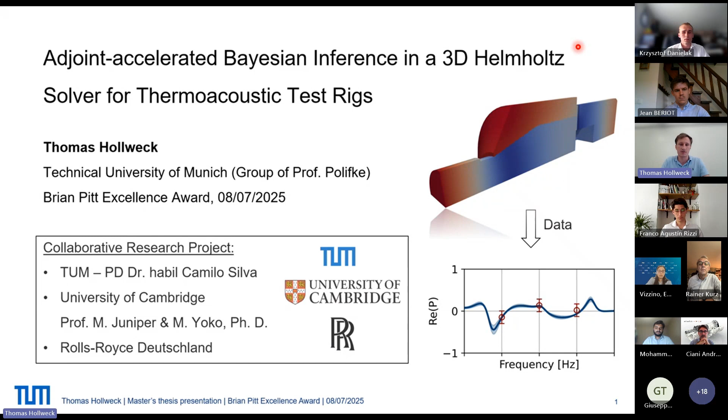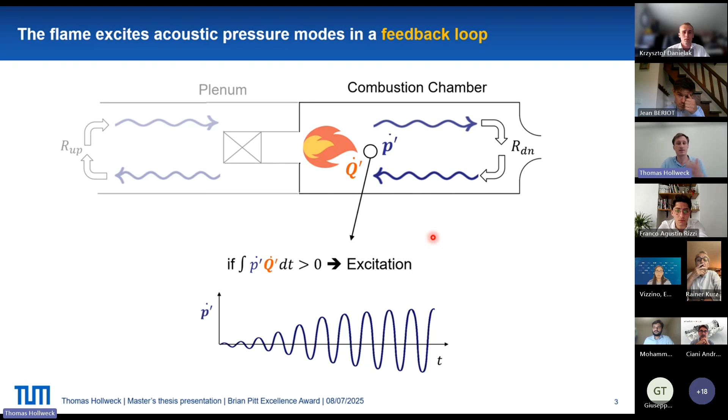How do they evolve? In a combustion chamber, the flame acts as a source of sound and emits acoustic waves, which can be then back reflected and propagate back to the flame, such that the feedback loop is closed. And in this feedback loop, we can excite those instabilities if the pressure perturbations and the heat release fluctuations are in phase, leading to high amplitude limit cycles potentially.

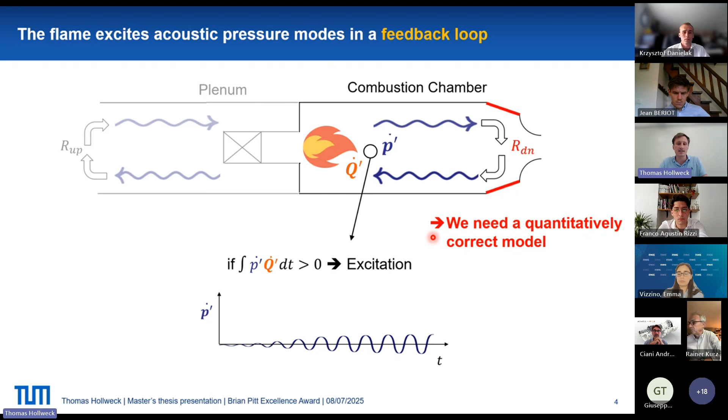However, we have the possibility to apply small design changes to mitigate those instabilities, since the thermoacoustic feedback loop is very sensitive to any kind of model parameters. However, to predict those changes, we need a quantitatively correct model, and just a qualitatively correct model is therefore not sufficient. And there are several models employed in thermoacoustics which differ in their model assumptions, their complexity. The one we focus on is a Helmholtz solver.

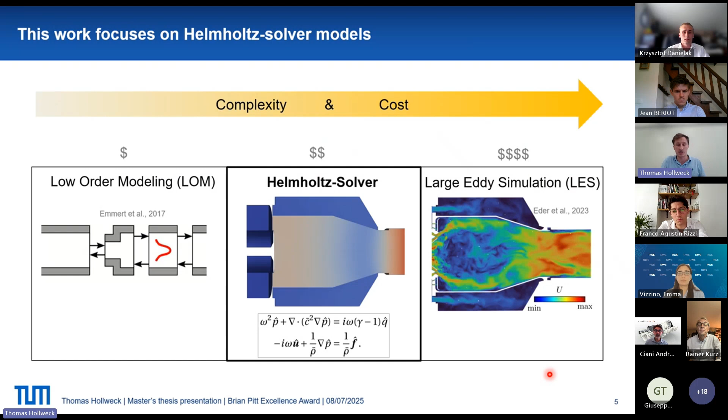A Helmholtz solver solves the 3D acoustic wave equations based on partial differential equations, and has, however, some simplifications like the assumption of zero mean flow, meaning it has some systematic model error. However, it is computationally efficient enough to perform some shape analysis, shape optimization in the early design process of a combustion chamber.

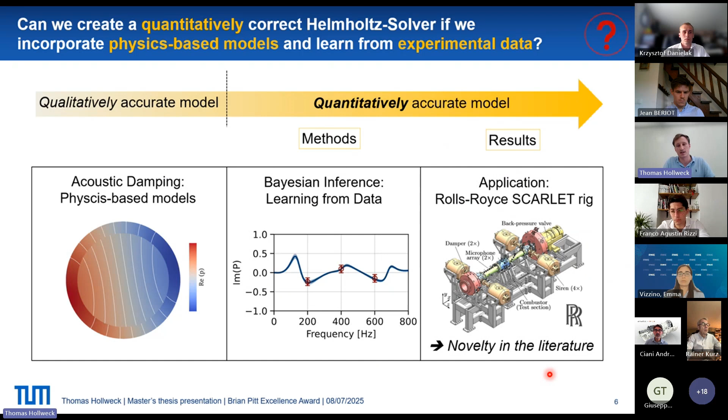In this work, we therefore investigate whether we can make such a Helmholtz solver, which is kind of qualitatively correct, even more qualitatively accurate by incorporating some acoustic damping due to mean flow, which is inherently neglected. And then in the second step, and this is what I focus on today, use data assimilation techniques to learn from data and possibly yielding a quantitatively accurate model, which is required. And we finally applied these methods to the Rolls-Royce SCARLET rig depicted here, which is kind of a state-of-the-art benchmark aero engine test rig.

So how do we learn these parameters? We have a physics-based model with a bunch of parameters which we are very uncertain of. And we use adjoint-accelerated Bayesian inference to get a posterior probability distribution of these parameters, incorporating all the prior assumptions we have on these parameters, and then this is formulated in the likelihood term, finding those parameters which agree with the prior and also explain the data very well.

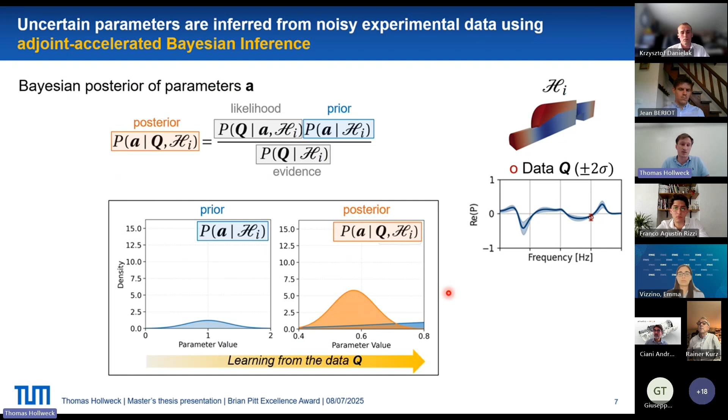And this process is illustrated here. So when we assimilate pressure measurements, we learn the values of those parameters and, as we see in the Gaussian here, get more certain in them. And to make it computationally feasible, we use adjoint methods. So the computational effort does not scale with the number of parameters.

Let us apply this to this test rig, which is depicted here. So the SCARLET test rig is operated under realistic engine conditions. And the combustion section in the middle is surrounded by two ducts, where we have some microphones installed, where we then can deduce pressure measurements, and we can force this rig upstream and downstream.

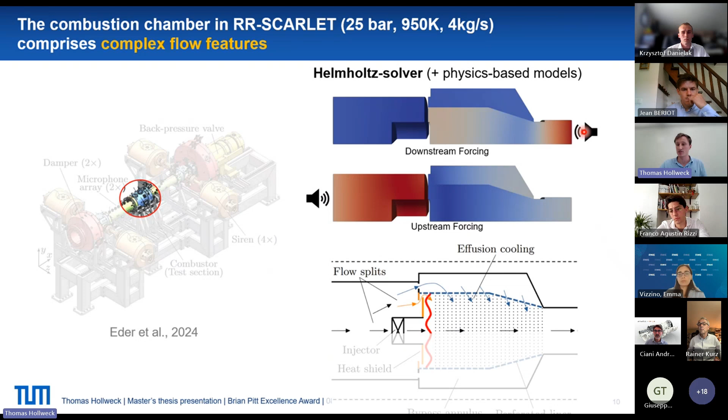This combustion chamber has a lot of complicated flow features, which a Helmholtz solver cannot model, but we include physics-based models in order to resolve this. And therefore, we have three-dimensional simulations with this Helmholtz solver, and in addition, these physics-based models, and assimilate data from upstream forcing and downstream forcing to get now a quantitatively correct model.

Let me summarize. This study has shown that we can use a very simple model, a Helmholtz solver, leave the physics in the model, use data assimilation techniques with adjoint-accelerated Bayesian inference, and then get a way more quantitatively accurate model. We can use such a model, for example, in the early design process of a combustion chamber to more reliably predict shape optimizations, and also go to frequencies where we don't have measurement data with uncertainty. In future research, we might extend the study even to reactive conditions and extrapolate to various operating conditions to verify our study.

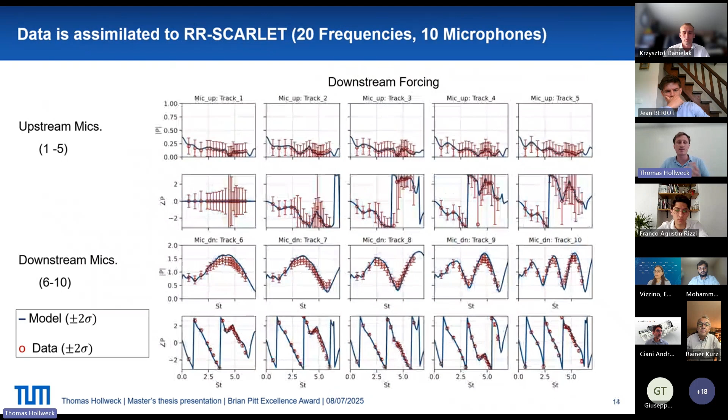That's also a very good question. In the study conducted here, I have a set of operating conditions as stated. However, the idea is, because we have a physics-based model, this model accounts for the operating conditions. And therefore, if it's a good model, and we try to judge whether it's a good model by this investigation, it should extrapolate to also non-measured operating conditions, which is definitely a part of future research and one of the biggest advantages of a model, because the experiments are super expensive, particularly the hot experiments.

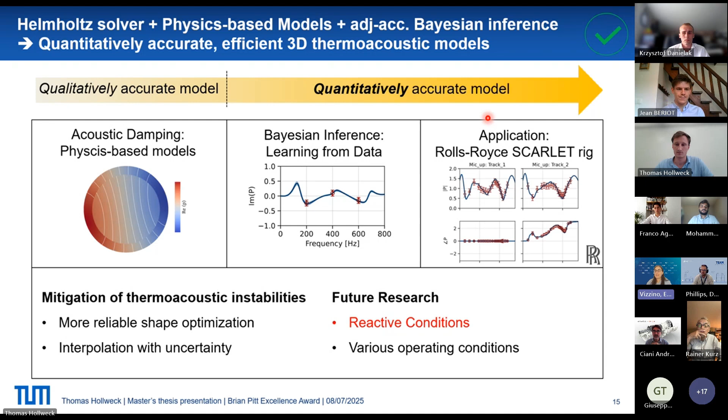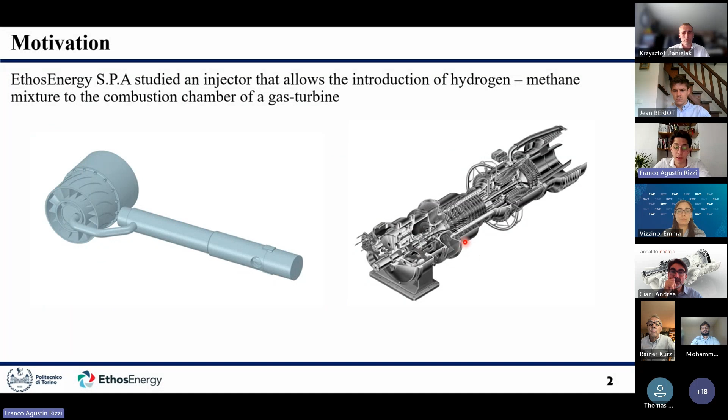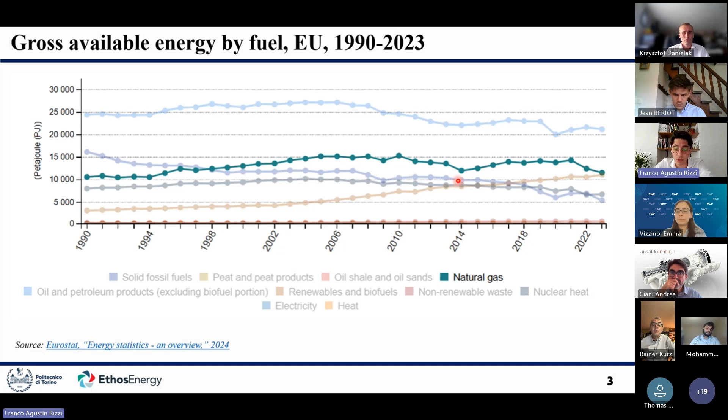So a CFD model, a RANS model, is developed in order to study it and be sure that the combustion will work and how it will work, and to characterize it. Here on the right you can see the combustion chamber, and on the left is the model of the injector.

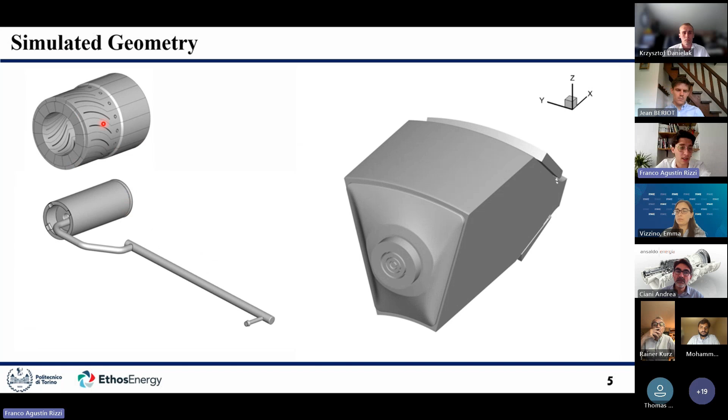Taking advantage of the axis symmetry, the model is reduced to a portion, and the injector is separated into two different models to reduce the model further.

Then the fluid profile is extracted here and here, in order to copy it back towards the combustion chamber. But of course, this has to be reconstructed and then set up in the simulation.

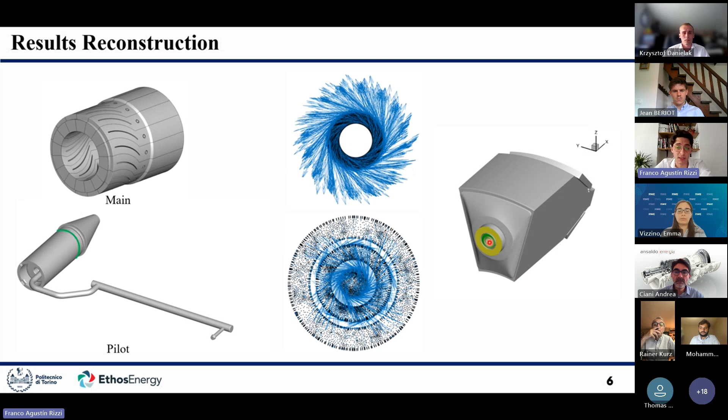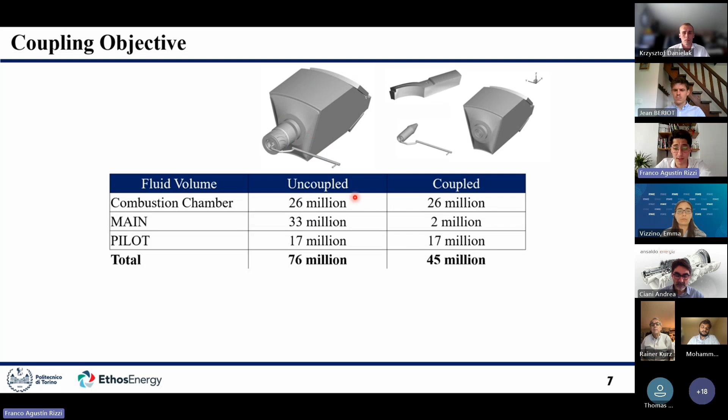The question arises: why do all this? Why not model the complete model with the injector without coupling, avoiding this complication? The reason is there's a 40% reduction in the number of elements, making it much more feasible for reproduction and with lower computational requirements.

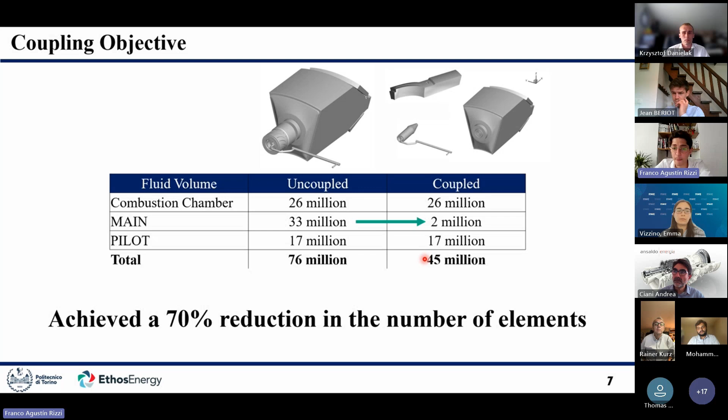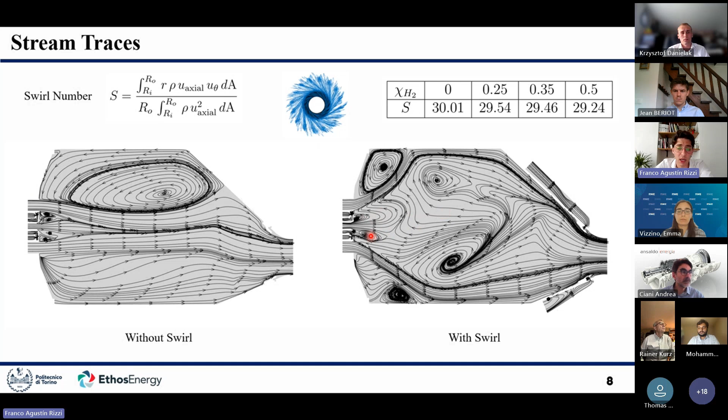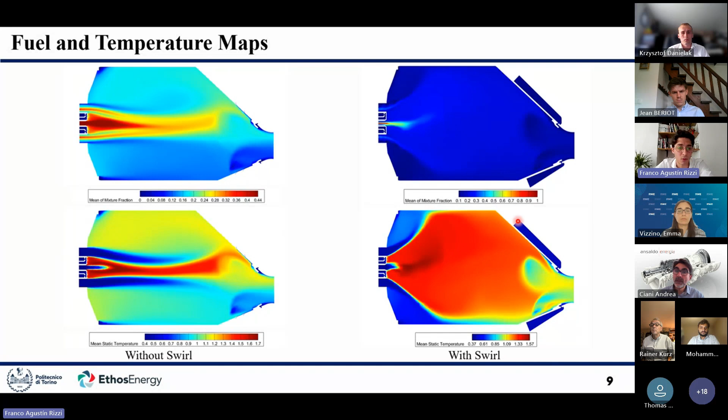When the swirl number is higher than 5, there's great recirculation, and also a low velocity region is generated, allowing the flame to be anchored. Looking into the mixture fraction and static temperature maps, we can see it becomes way more uniform with the actual mixing, which makes sense.

You may note there's a difference here, and this is the modeling of the effusion holes. This is the cooling of the wall of the liner, and these are the dilution holes. These are the diffusion holes. These are the splash holes.

One first approach was to use two cooling stripes for the fluid coming through these small holes. Meshing it would be quite expensive in terms of element size. An alternative was found: using a perforated wall model that assigns injected fluids to surfaces.

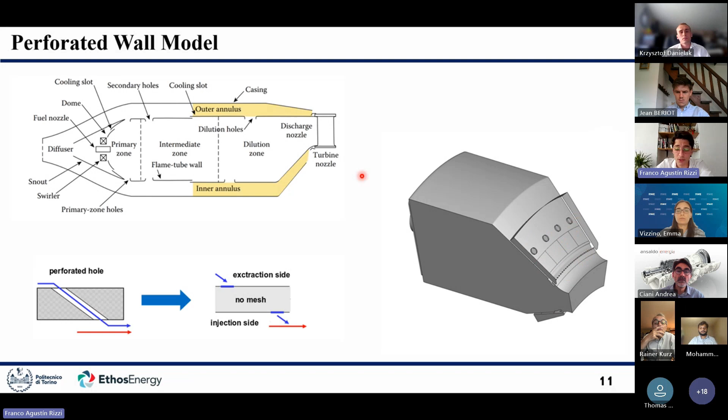This requires an extraction surface, so the annulus had to be incorporated into the model. These four surfaces are the injection side of the effusion holes. Note that the dilution holes and splash holes are also included inside the annulus, allowing them to be modeled as well, so it was a double improvement.

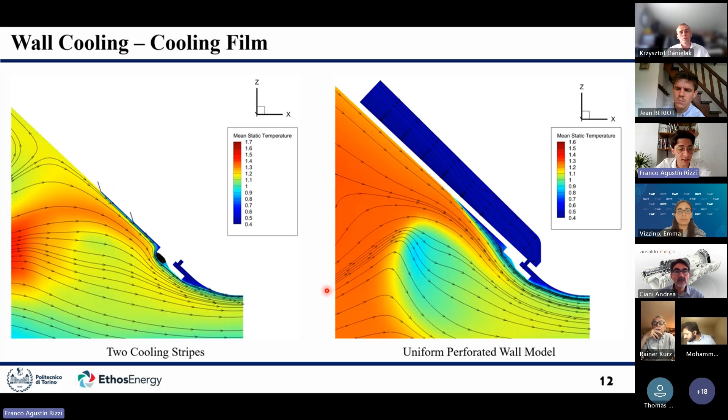Looking into the two cases, first with the two stripes, there wasn't a great cooling film, so it became more realistic once the dilution holes were included. The original case had flow normal to the surface, which was not the actual case. Once it's modeled, there's a bit of deviation.

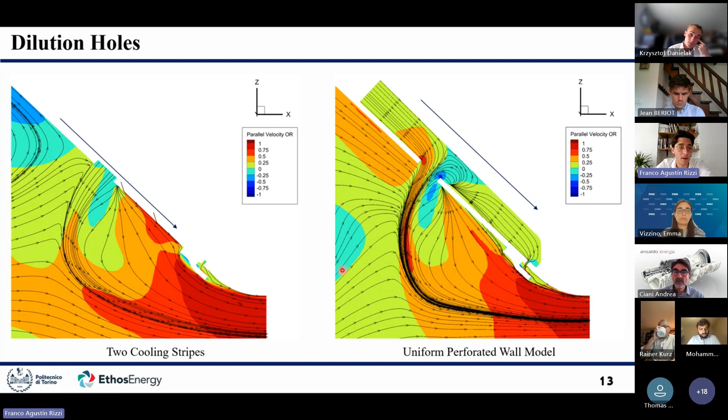Changing the inlet and the cooling changes the outlet temperature distribution here. It becomes way more uniform, which is the desired result. You can also see some low temperature regions here.

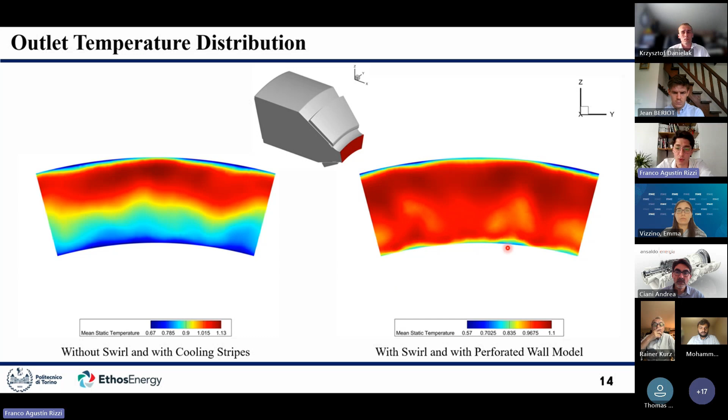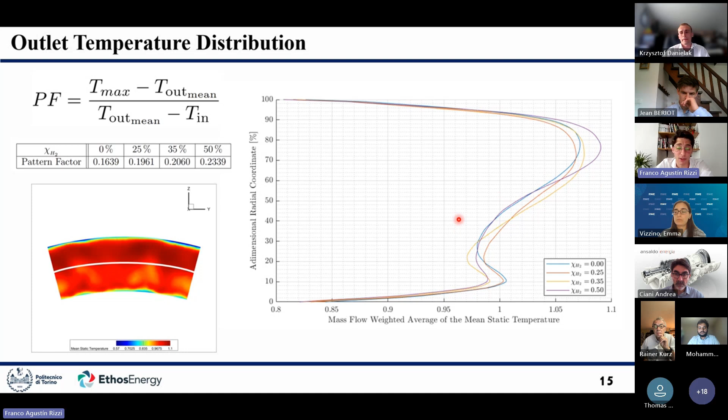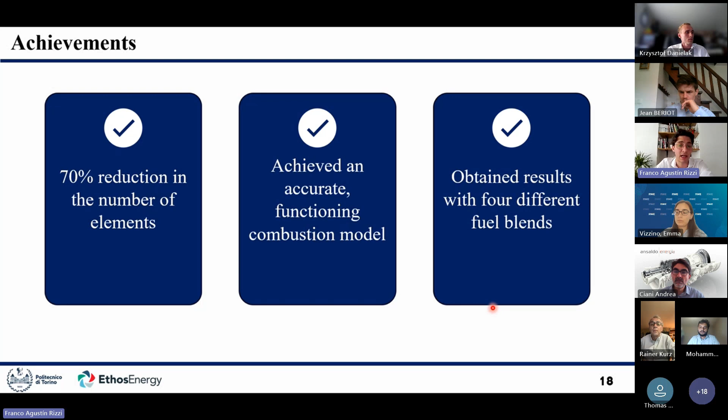To sum up, the first achievement was the 70% reduction in the number of elements, making it more feasible for reproduction and reducing computational requirements. Then, achieving an accurate combustion model is required in order to compute the NOx simulation afterwards, since it's a post-process of the combustion. And then the four different fuel blends were achieved, allowing us to characterize the combustion chamber. Thank you very much.

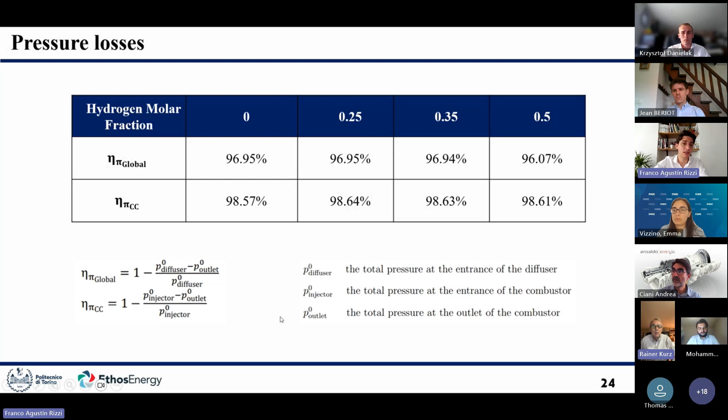Well, actual flashback was not the idea of looking into the upstream movement. We were looking into the position of the highest concentration of OH. This is how we saw the flame moving upstream, but we didn't actually see flashback.

Okay, but you would have seen it if there were flashback, so the model would have been capable? Exactly. And I believe that before setting up the settings, some models saw something going towards the injector, but we would be able to see it. Yes. Okay, thank you.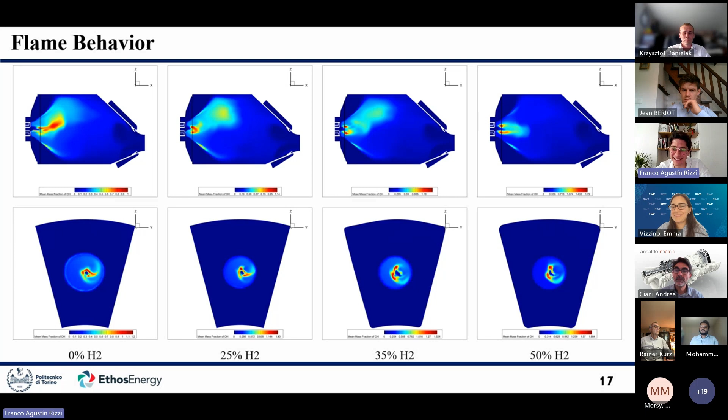Sorry, the diameter of your injector? No, I can't say the diameter of the injector because I'm not allowed to. Sorry. Okay, no problem. Thank you, I'm sorry. It's okay, intellectual property, we know.

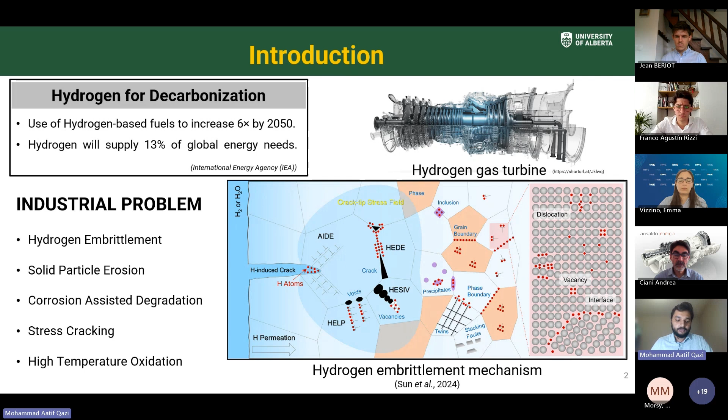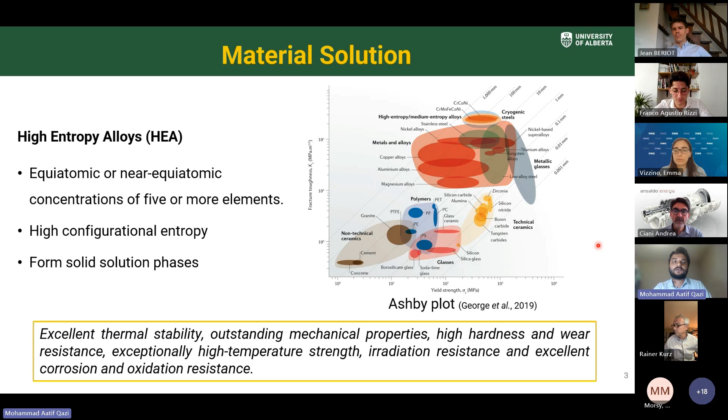To combat these problems, we need a material solution, and high entropy alloys are one such material, produced by equiatomic or near equiatomic mixing of 5 or more elements. High entropy alloys lie at the top right of the Ashby plot, meaning they have high fracture toughness with high yield strength. Overall, they have excellent thermal stability, outstanding mechanical properties, high hardness and wear resistance, and excellent corrosion and oxidation resistance.

To protect energy systems using high entropy alloys, we need a coating fabrication process. Flame spray is one such cost-effective process. Our group has been working on flame spraying high entropy alloys, and we have found that they have high hardness, promising oxidation resistance, high wear resistance, and high corrosion resistance.

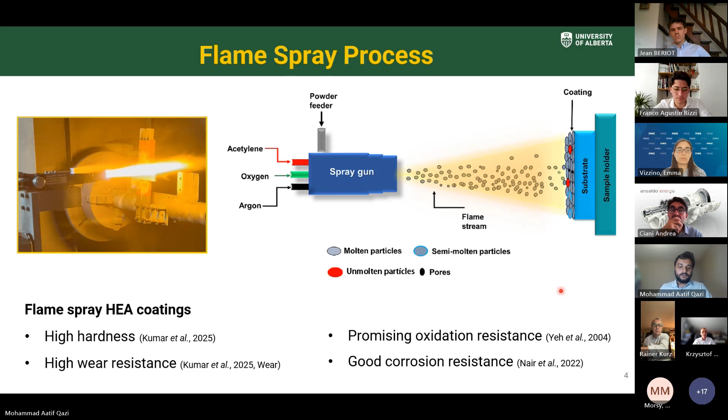Coming to the motivation behind this study: flame sprayed AlCoCrFeMo high entropy alloy was developed at our group, and it has shown excellent performance against wear, erosion, and chloride induced corrosion. Zirconium comes in as a strategic addition because it forms hard Laves phases and ZrO2. It also facilitates hydride formation and hydrogen trapping. Overall, this study investigates how zirconium addition can unlock new frontiers in flame-sprayed high-entropy alloy coating performance by integrating wear, corrosion, and hydrogen resistance into a single coating system.

Overall, producing a multifunctional coating with the potential to combine bond and top coat functions for simpler turbine hardware protection. The objectives of the study include the development of AlCoCrFeMo coatings via flame spray, evaluation of mechanical performance under impact-dominated loading conditions, assessment of corrosion behavior, and finally, the investigation of hydrogen embrittlement resistance.

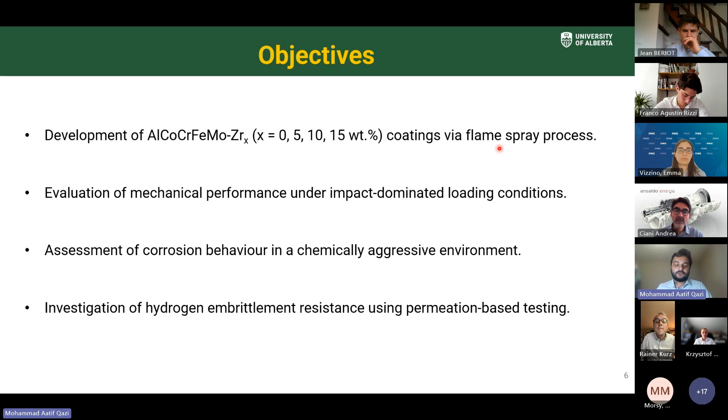The experimental methods include preparation of the feedstock by tumble mixing of Zr in 5, 10, and 15 weight percentage to AlCoCrFeMo, and characterization of the powder. Then we move to the coating fabrication using flame spray on 316L stainless steel substrates, and characterization of the coatings. Then the coating performance assessment using mechanical tests like microhardness testing, coating adhesion testing, solid particle erosion testing, and then electrochemical tests like electrochemical corrosion testing and Devanathan-Stachurski hydrogen permeation testing.

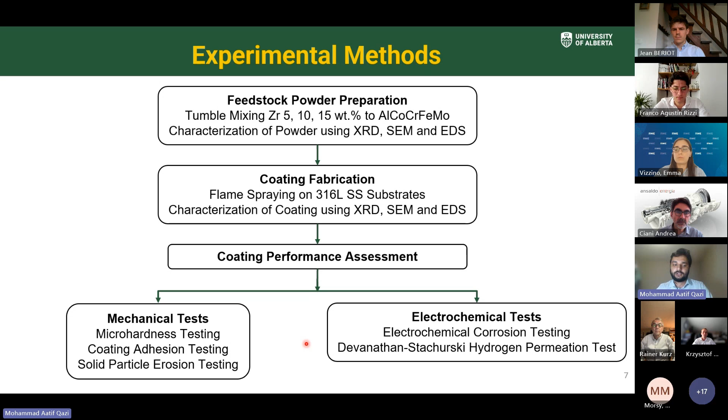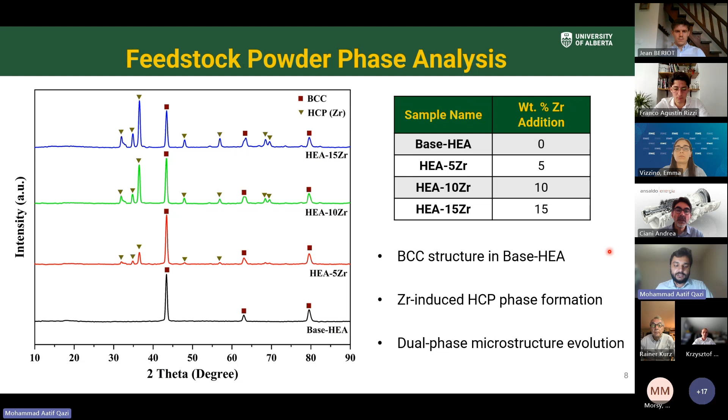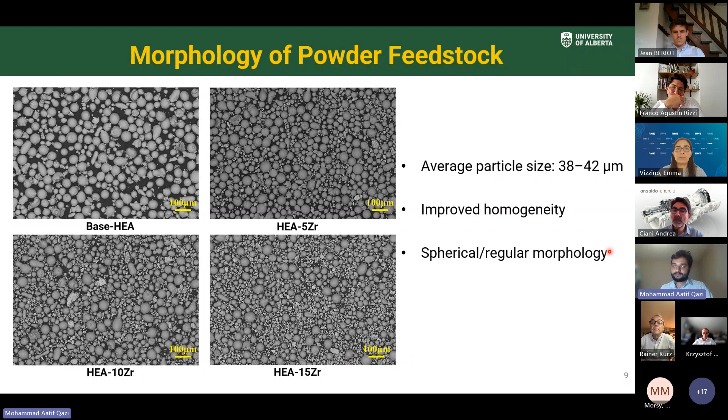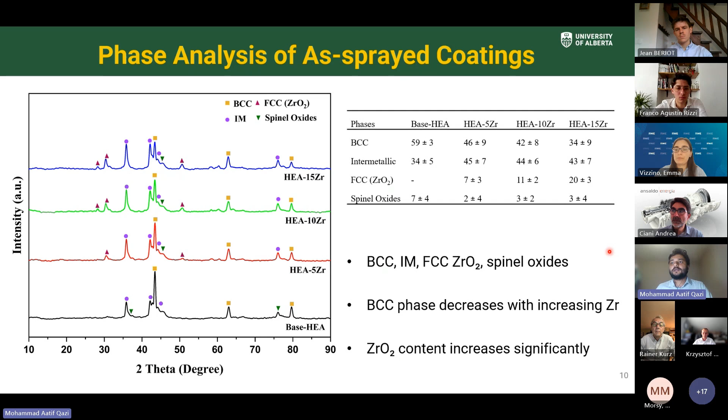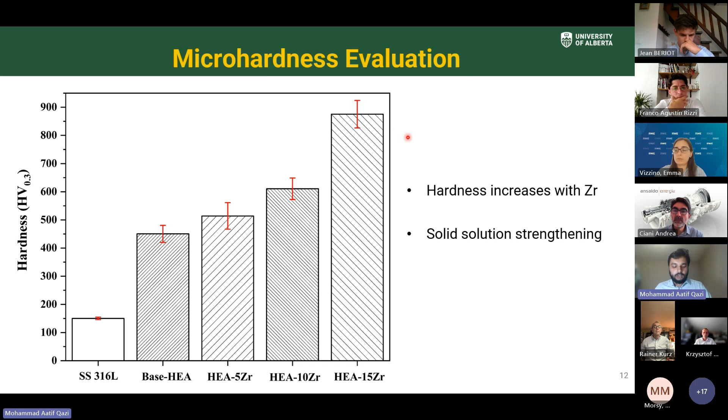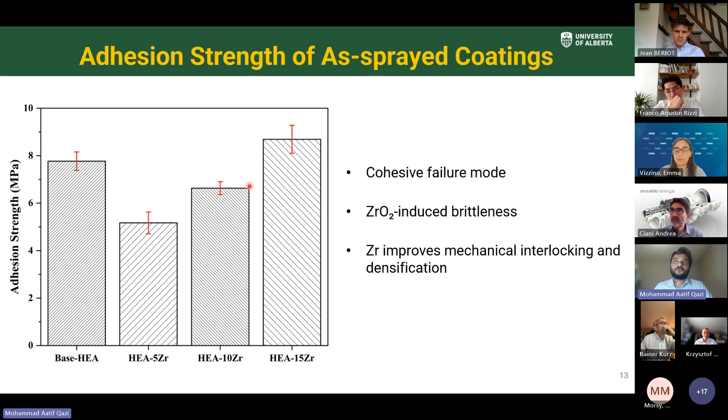Moving to the microhardness evaluation, which shows an increase in the hardness with the increase in Zr, reaching up to around 900 HV. Next, we have the coating adhesion strength test, which shows a cohesive failure mode with an initial drop in the adhesion strength at 5 weight percentage, but then an increase in the strength up to 15 weight percentage. The solid particle erosion testing done at 30-degree impact angle showed decreasing erosion rate up until Zr 10 weight percentage, and then a slight increase at 15 weight percentage.

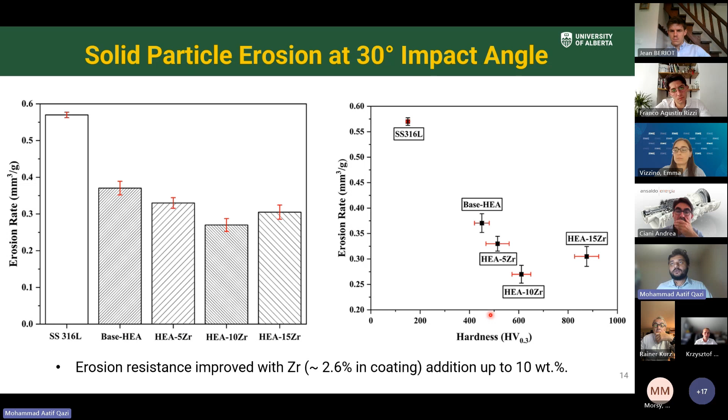Comparing the erosion rate with the hardness, we see the erosion rate decreases with the increase in the hardness up until Zr 10 weight percentage, but then an increase in the erosion rate with the increase in hardness. So it shows that toughness also plays an important role in determining the erosion. Similar results were observed when solid particle erosion testing was done at 90-degree impact angle. Next up, we have the electrochemical corrosion testing, which shows increase in the corrosion resistance as the Zr content in the coating increases because of the formation of stable Al2O3 and

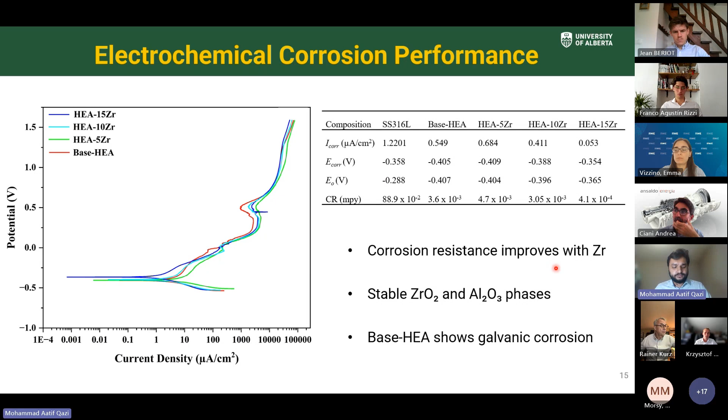ZrO2 phases. And finally, the hydrogen permeation performance assessment of the coating showed initial hydrogen ingress due to high diffusion coefficient, but suppresses the hydrogen movement within the microstructure because of high trap density and low solubility, overall outperforming the substrate SS316L.

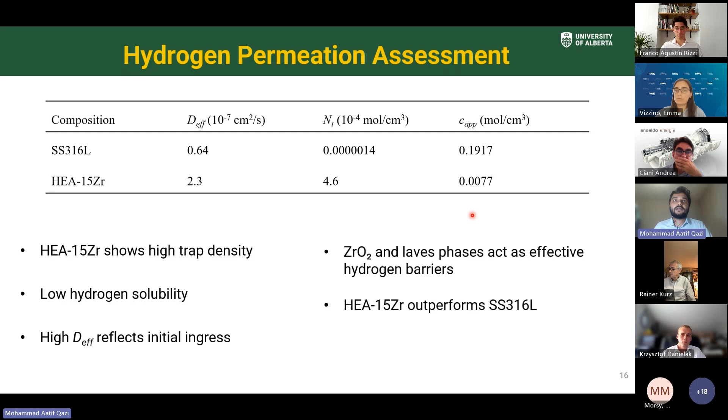Coming to the conclusion from the study, we were able to fabricate AlCoCrFeMo coatings using flame spray. We saw an improvement in the mechanical performance, with HEA-15Zr exhibiting the highest microhardness and adhesion strength. HEA-10Zr is the most erosion-resistant composition. Zr addition enhanced corrosion resistance, with HEA-15Zr showing the lowest corrosion rate. And HEA-15Zr is an effective hydrogen barrier. Lastly, by addressing key surface degradation modes, these coatings pave the way for resilient and hydrogen-compatible turbine components.

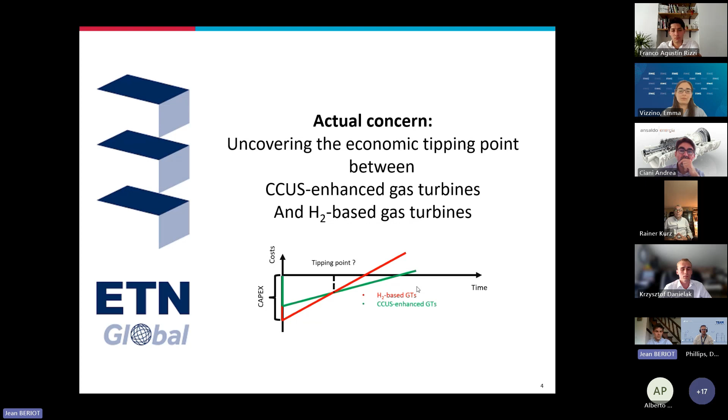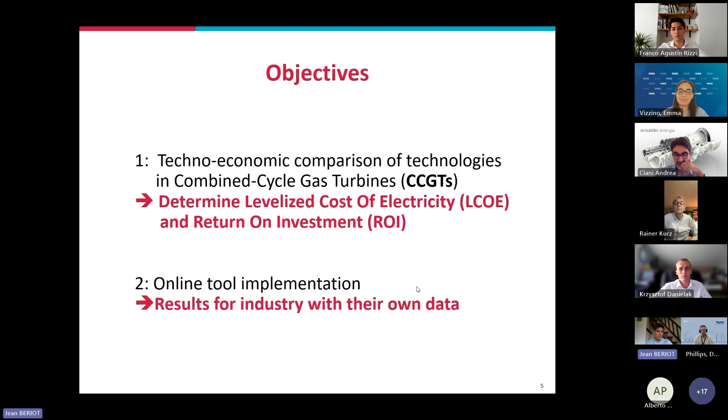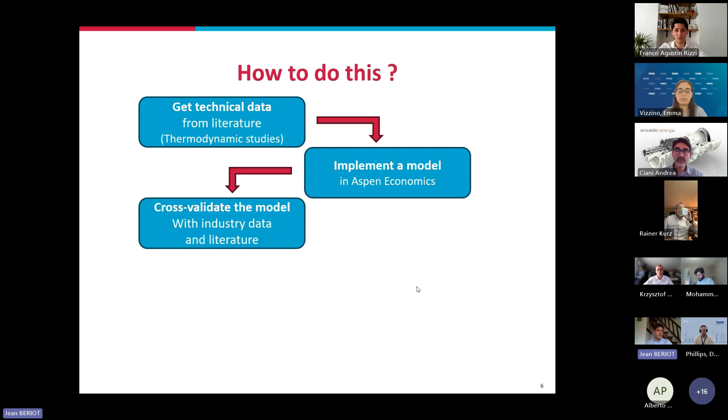In this context, one of the main actual needs of ETN is to determine which of the two technologies will be economically more viable by uncovering the economic tipping point between the two. And this is what I did in this study by first performing a techno-economic comparison of the technologies in their combined cycle form, and then implementing an application allowing industry members to get their own results with their own parameters. And I did this by first gathering technical data, allowing me to implement a model on Aspen economics to get technical and economic values that I later cross-validated with data from industry and literature, ensuring the implementation of a consistent economic model of the two solutions to finally get results.

So let's begin with the technical part of it by first talking to you about carbon capture. The main economic advantage of this is a reduction of the carbon taxes, but this is at the expense of some negative outcomes. Indeed, this process will lower the efficiency of your power plants, and then it is an expensive process with particularly high investment cost and also involving additional OPEX, but we will see these later.

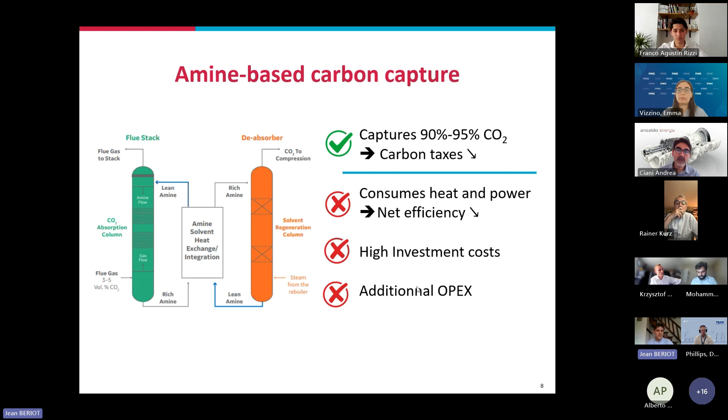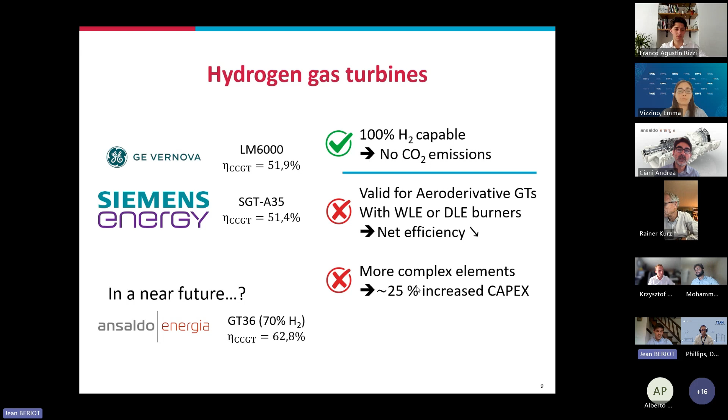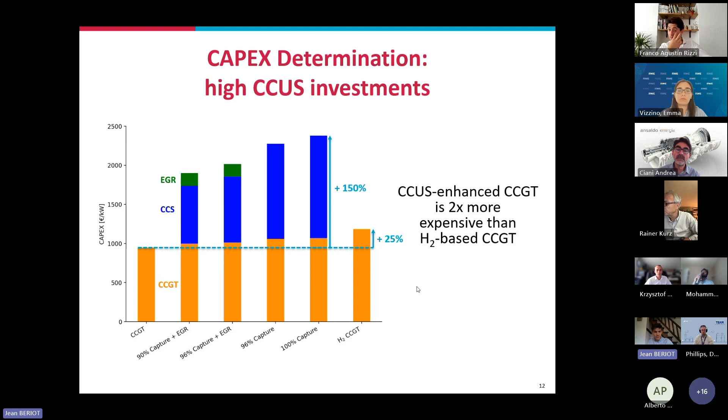But what's the price of these power plants? Well, this can be plotted on this chart, where you can see that carbon capture is expensive. And by expensive, I mean twice as expensive as a hydrogen gas turbine. Indeed, while investing in a hydrogen CCGT will only be 25% more expensive, capturing 100% of the CO2 will lead to 150% more CAPEX. And then, what will be the cost to run each of these power plants? And this can be plotted the same way.

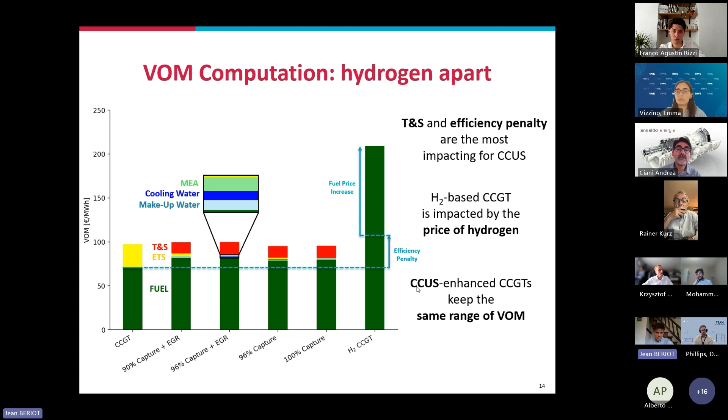On the other side, for hydrogen gas turbine, the efficiency penalty impact is directly combined with a fuel price increase due to the high price of hydrogen. And now let's see the impact of it on the results. And let me first compare the LCOE of the different technologies, where you can see that CCS doesn't increase the LCOE of a CCGT that much, with an increase mainly due to the additional capex, while a hydrogen CCGT LCOE will be more than 10 times higher due to the higher marginal cost.

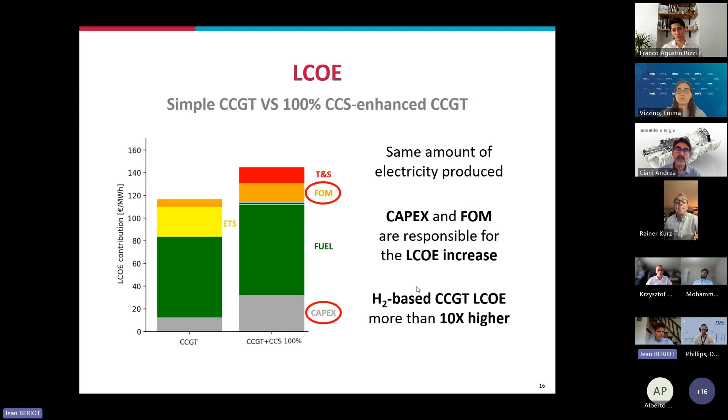But what about the tipping point between the technologies? And without any surprise, there is an economic tipping point after 15 years. But my question is, do we really care about this tipping point? No, the main conclusion is neither of the two solutions is currently worth it. But hydrogen-based CCGT has more work to do than CCS-enhanced CCGT to be economically viable.

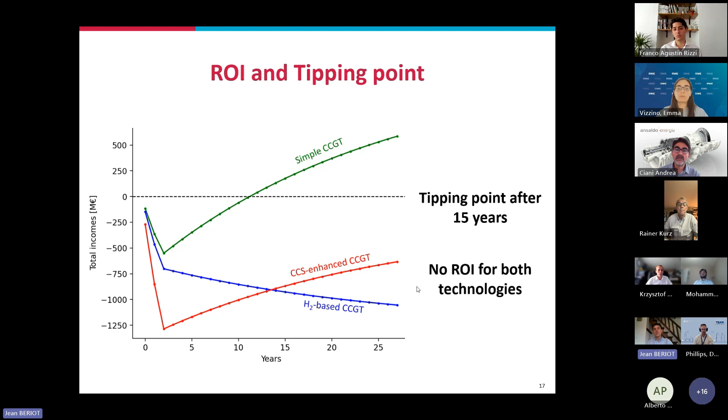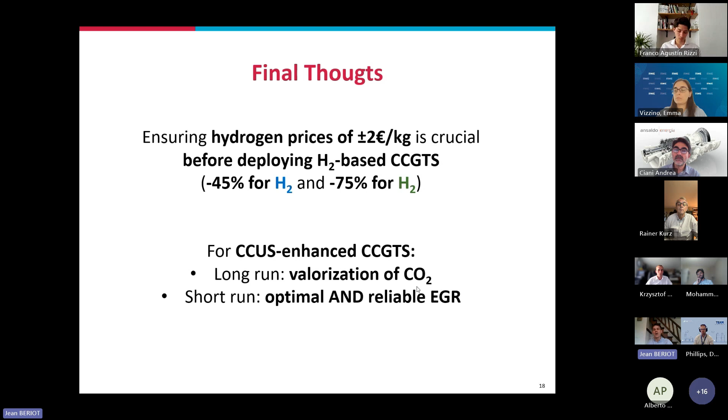Knowing this, what I can tell you is that ensuring hydrogen prices averaging 2 euros per kilogram is crucial before deploying hydrogen-based CCGTs. And this represents a 45% reduction for blue hydrogen prices and a 75% reduction for green hydrogen prices. And then for CCS-enhanced CCGTs, a long-run important challenge would be to valorize the CO2, while a closer challenge is to ensure an optimal and reliable EGR in combination with CCUS.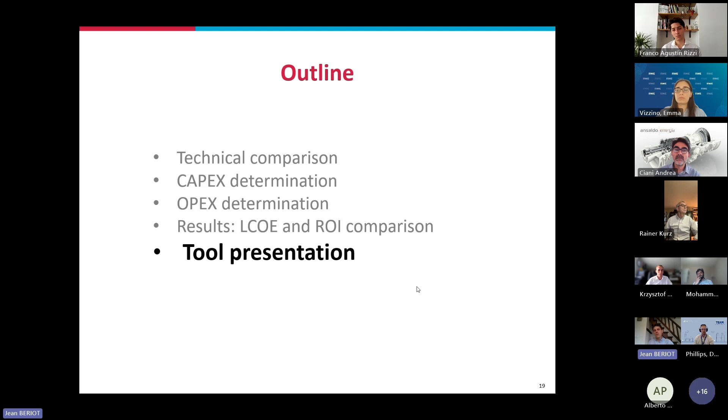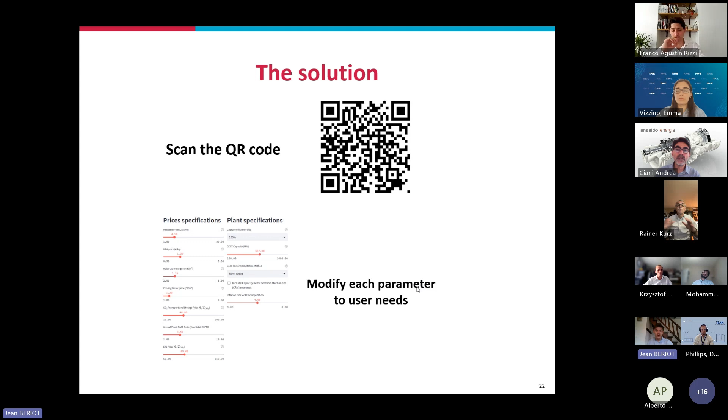Okay, maybe when I was presenting you the results, you were surprised with the value or simply didn't agree with it. And this is partly why I made the tool I will talk about. To present this tool, I want you to get in the shoes of an industrial who is interested in this study, maybe you, but this study doesn't reflect your own parameters, and you can't share confidential data to a random student, me. So what I propose to you is to scan this QR code, choose grid data between different countries, modify each parameter following your needs and your specific power plant data, and then get your results based on it.

So, okay, I think the only thing left to say is thank you for having listened to me and feel free to try the application.

Brilliant presentation. Love the energy. Thank you very much. We already have questions coming in. Brilliant. Over to you, Rainer. Thank you.

Thank you. So I think this study that you're doing is extremely important for technology development. I was just wondering, what kind of system boundaries did you use for your evaluation? I mean, just to give you an example, did you just assume the cost of creating low pressure CO2, or did you include the cost of compressing it and then transporting it somewhere? And in particular, how did you do that? Okay,

the cost of compression is directly taken in the CapEx with a compression and purification unit. So three-stage compression till 99.6% purified CO2 at 30 bars. And so this is the typical level of pressure and purification needed to inject it on the network, typically in Belgium.

And then for the transport and storage cost, this was mainly gotten from industrial data, because at the beginning I was taking a lower transport and storage cost of CO2, but then industry, typically a member from TotalEnergies, told me that it was rather in the range of 40 to 50 euros per ton of CO2 transported. Okay, so you did not assume that the CO2 would eventually have to be compressed to supercritical state? No. Okay, thank you.

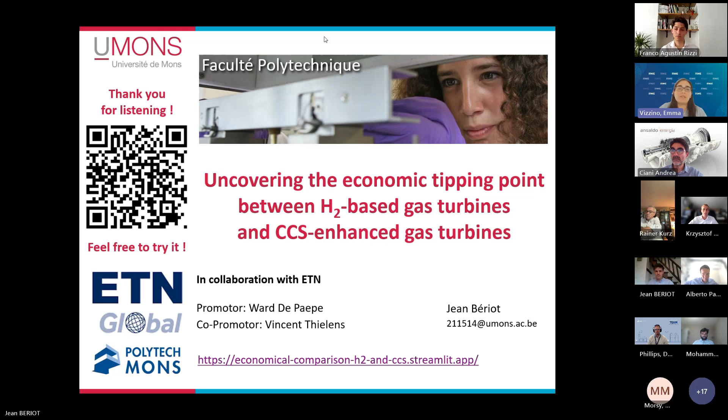Okay, good afternoon. My name is Krzysztof Danielak, and today I will present the findings of my research into the feasibility of using both liquid and evaporated methanol as an alternative fuel for power generation gas turbines. This research is a collaboration between Cranfield University and Uniper Technologies.

Give me a second, something is not working.

Okay. Methanol is a different fuel compared to methane. One of the most important differences is its lower heating value, which requires 2.5 times more methanol to be pumped than methane for the same energy output. This study focuses on a real power station equipped with a Siemens gas turbine. Also, the future projections, as you can observe on the diagram on the right, indicate a rise in green and low carbon methanol production, highlighting its growing potential as a valuable fuel option.

Previous studies on diffusion liquid firing with kerosene have shown up to 80% reduction in NOx emissions when switching to methanol. These two aspects emphasize that methanol is a good alternative fuel and can also be used in power generation gas turbines. However, no studies have yet investigated the use of evaporated methanol in a dry low NOx system. This research addresses its feasibility and the combustor modifications required.

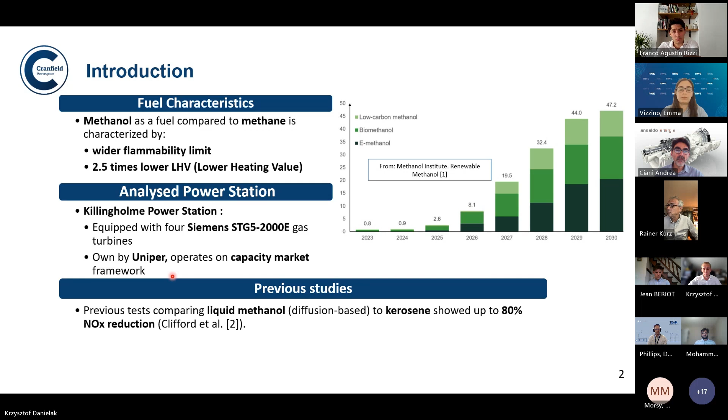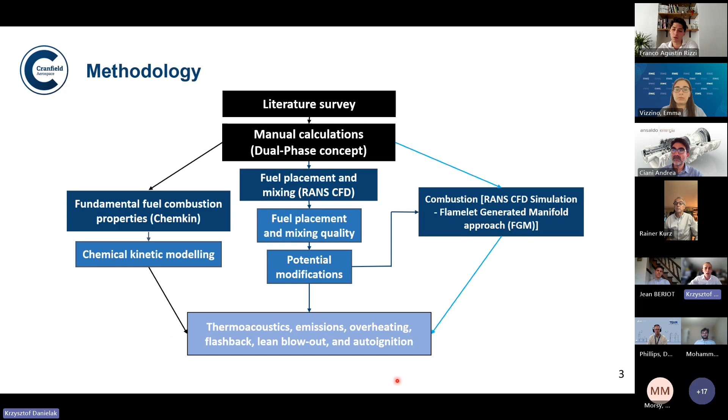In terms of methodology, initial manual calculations were performed for the dual-phase methanol concept to investigate its feasibility. Then, the study focused on three main areas: chemical kinetics to explore the benefits of methanol's chemical properties, fuel placement and mixing, and combustion analysis using CFD simulation to evaluate the use of methanol within the representative geometry of a burner. These sections aim to address the critical aspects outlined at the end of methodology 3. It is important to note that the assumptions applied in the simulations are grounded in recognized best practice, though they are not derived from detailed data.

The engine features a Siemens hybrid burner; dual-fuel versions capable of operating on both liquid and gaseous fuels are available. Based on this, the dual-phase approach was developed, in which the turbine starts on liquid methanol and transitions to evaporated methanol during normal operations. To address high fuel supply pressure demands associated with increased mass flow, one key design modification considered was increasing the fuel injection area.

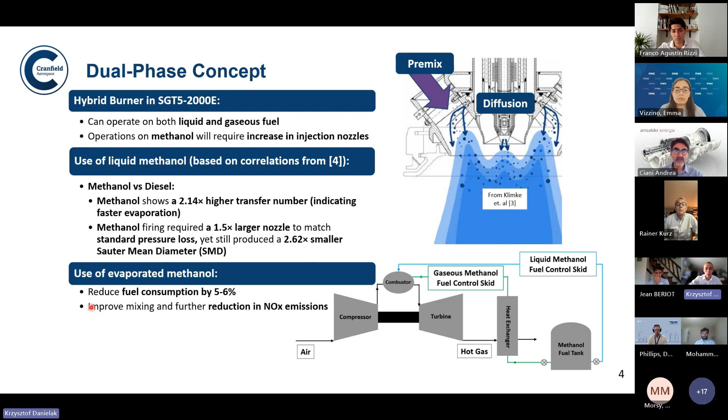For liquid methanol, better performance was observed compared to diesel in terms of fuel evaporation. This is attributed to a transfer number that is twice as high and a smaller Sauter mean diameter, even when using enlarged injection nozzles. Evaporation and superheat of methanol can be achieved by implementing waste heat recovery, as illustrated over here. This approach can cut the fuel consumption by 5–6% compared to liquid methanol, and also enhance mixing and potentially lower NOx emissions.

Considering chemical kinetics, methanol displays a higher laminar flame speed than methane, which increases the risk of flashback but concurrently reduces the likelihood of lean blowout. Also, based on an adiabatic perfectly stirred reactor model that was used to estimate emissions under identical conditions, the results indicate that methanol produced approximately 10% lower NOx emissions than methane at the reference flame temperature. This is mainly due to the chemical pathway, where early creation of steam cools down the flame.

The goal of the CFD modeling was to identify injection vane modifications to accommodate methanol's higher mass flow. Two strategies were analyzed: a uniform increase in all nozzle diameters and a non-uniform increase following those two distribution patterns. In the mixing quality analysis, we used the normalized equivalence ratio to evaluate fuel-air distribution. Contour plots show higher fuel presence for all methanol cases, with the unmodified configuration offering the best mixing. However, the resulting pressure losses are considered excessive.

The case with a uniform increase in all nozzle diameters produces a mixing pattern closest to the reference methane case, but introduces fuel-rich pockets in the low-velocity regions. Presence of a more reactive fuel in this area increases the risk of flashback. To mitigate this, a non-uniform increase in nozzle diameter was considered. This redirects the fuel towards the burner axis, eliminating rich pockets and thus reducing the flashback risk. These findings highlight the need to balance mixing quality with acceptable pressure loss.

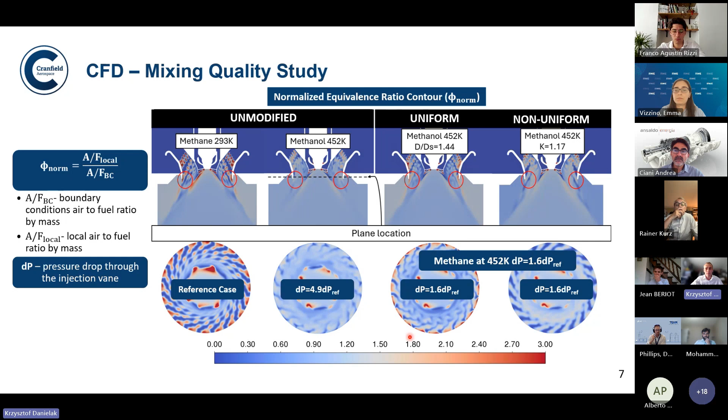In the combustion modeling, all methanol-fired geometries exhibit overall flame shortening compared to methane. As you remember, this is attributed to methanol's higher flame speed, as supported by chemical kinetics. Rich fuel pockets in the corner recirculation zones observed in both the methane reference case and the uniform nozzle methanol case resulted in elevated temperatures, increasing NOx emissions and the risk of overheating. Overall, the uniform nozzle configuration performed worse with higher CO and NOx levels.

Something happened. I think we lost our presenter. Let me call him. He's in the meeting, but I think I see what happens. What happened? Krzysztof, do you hear us? Okay, I have to recall him. Wait a second.

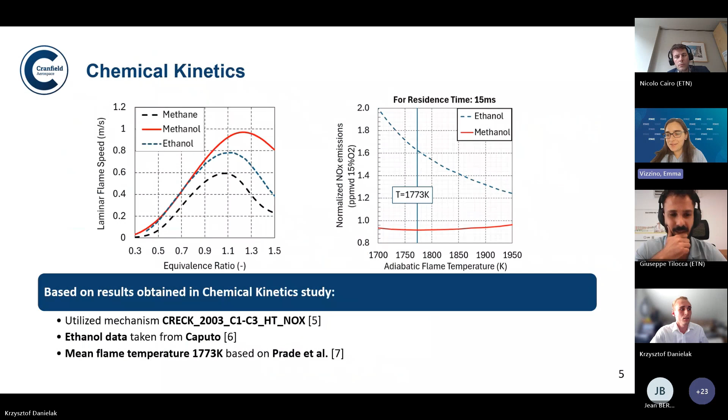I'm extremely sorry. Something happened to my Teams and it just froze. I don't know why. It's okay, Krzysztof, don't worry. We've had problems this end as well, so not to worry at all. Okay, could you please tell me at which slides there were some kind of problems? I think it was fine up till the end. I stopped the timer at about 1 minute 30.

I think you were here, on the conclusions. We saw until here, didn't we, Giuseppe, if I'm not wrong? Yes, until here. I didn't get to the conclusions, no. Okay, perfect. But if you need some time, Chris, it's also okay. Don't worry, nothing happened, all is good. I would suggest to go through slide 8 again, because I think this is really interesting. Okay, so I will go once again.

In the combustion modeling, all methanol-fired configurations exhibit overall flame shortening compared to methane, attributed to methanol's higher flame speed, as supported by chemical kinetics. Also, fuel-rich pockets in the corner recirculation zones observed in both the methane reference and uniform nozzle case resulted in elevated temperature, increasing NOx emissions and the risk of overheating. Overall, the uniform nozzle configuration performed worse with higher CO and NOx levels.

In the unmodified case, good mixing lowered the flame temperature in the recirculation zones, reducing NOx. However, CO rose slightly. In the non-uniform case, flame shortening resulted from higher fuel concentration and richer mixture in the mid-radius, producing peak temperatures below those of the methane case. This configuration offers the best trade-off, with notable NOx reduction and only a slight CO increase.

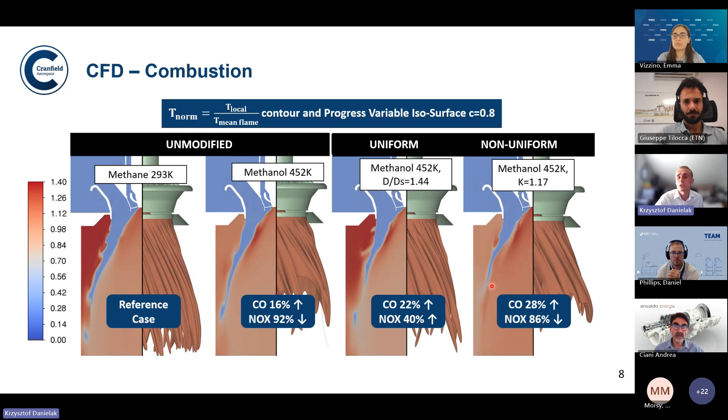In conclusion, the study showed that methanol could be considered as a potential substitute for natural gas and is worth further investigation, like thermoacoustic performance or LES simulations. However, modifications to both the engine burner and the fueling system are necessary to improve efficiency and make it possible.

One of the main challenges of using methanol as a fuel is its increased flashback risk, as shown in the previous diagrams. Nevertheless, emissions benefits can potentially be achieved, especially when using non-uniform fuel distribution and leveraging methanol's chemical properties, as you remember from the perfectly stirred reactor model, which can effectively lower emissions and reduce flashback risk, all while maintaining an acceptable fuel supply pressure.

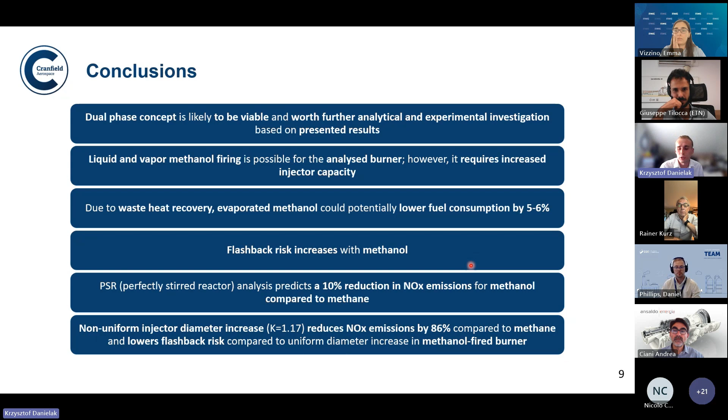Listed here are the main references, and thank you very much for your attention. I would be pleased to answer any questions you might have regarding this research. I hope that this small break doesn't totally destroy the presentation. No, absolutely not. Thank you very much. It was a great presentation. Jury, over to you for questions. Yes, Rainer? We cannot hear you.

I was very impressed how you recovered on your presentation, so that was actually very good. On your modified combustor configuration, the problem when you have this non-uniformity is that you probably can optimize it for one operating condition, but did you also look into how this affects the combustor over the entire operating range?

No, because in this study, we mainly focus on the base load application, let's say, the full load application. And this is one of the next steps potentially in this research, to check how the combustor dynamics will work. Because, you know, I was one of the first people investigating a DLN configuration with methanol. There were some studies in liquid firing, like it was done in Israel. Also, von Schmidt in the 80s did one of the studies.